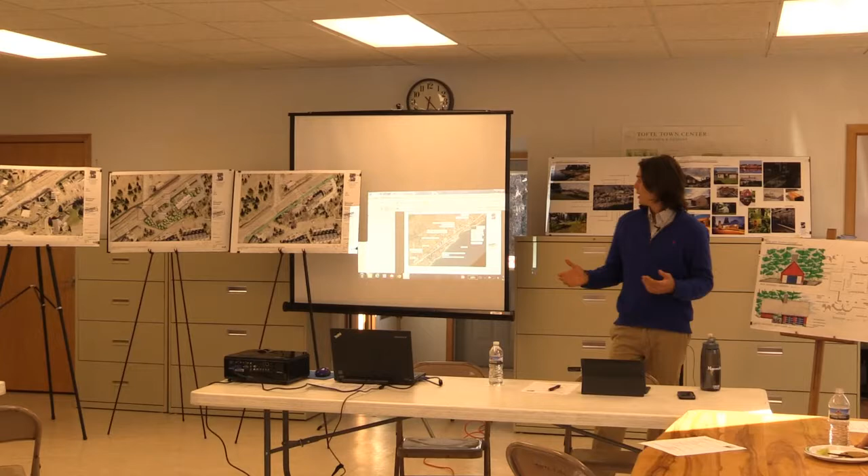Primarily, we got going on a design project to enhance the accessibility and safety of a wayside, our site, and also maybe bring in some interpretation. We had money to put together a wayside design project similar to this to improve the accessibility and safety, which was the main focus going into it.

As a Scenic Drive Council, it's a group of elected officials and volunteers from all three counties, all the way up in communities as well. We sat down with a list of 65 different waysides on that byway. We came down to a short list, had some conversation, got a shorter list, and I think it was down to about five. Late in 2014, we met with representatives from each one of those all along the shore.

Like we said, we had money to host one wayside design project. We wanted to get the most bang for our buck. We wanted to go in, talk to the locals, see what kind of capacity was there to implement, and not just have a wayside design that goes on the shelf. All of those meetings went extremely well. There was a lot of enthusiasm specifically here. A lot of people you see here today were there on that gorgeous fall afternoon, where we were able to come in and see the park and then move on.

So when I got back to Andy that evening or the next day, I said we were going to have a really tough time whittling this down because each one of those meetings went really well. The sites that we picked all had great quality, and a lot of enthusiasm turned out. So we got back and started patching together some way to make all of these happen and not have to make that hard decision.

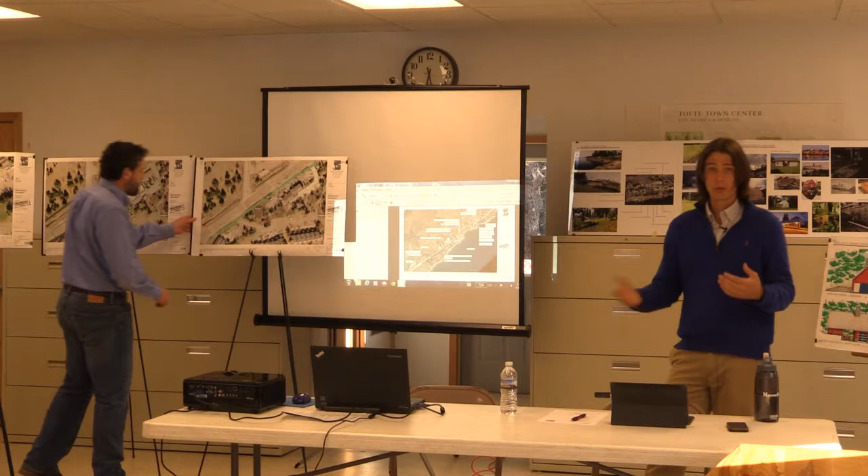So that's why we're here tonight, to present these for the first time, get the big ideas out there, see what sticks, looking for a lot of feedback and dialogue. Maybe there's an area that went a little too far, or just try to get some feedback on where we're at. This is meeting number 2 of this 3-meeting series. The third and final one will take the information that we get tonight and, specifically for the park, bring things down into a final design. Maybe with the trail, it ends up being down to 1 or 2 options. Ideally, just one after tonight.

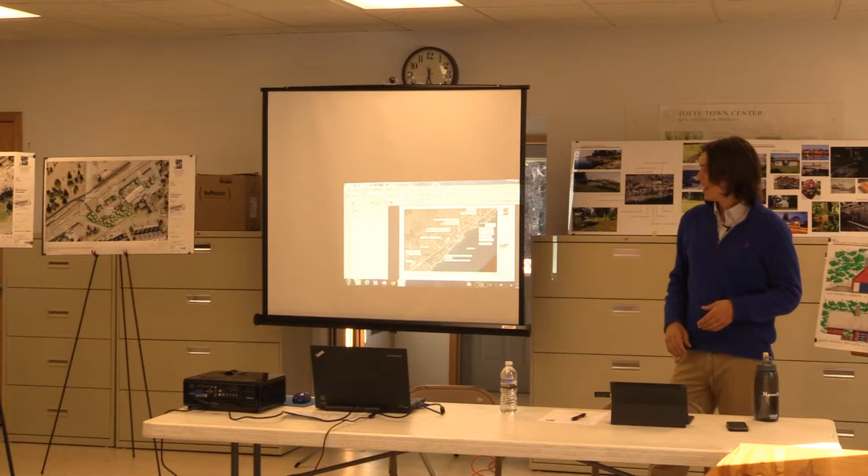That third meeting will be another public presentation similar to this evening, looking to finalize that document, and then any little revisions or changes that come from that, we can certainly make, and then look to put things into a report. In the past, we've done this for a while, where we know what that document needs to have in it when it comes to looking for extra funding, specifically with the park side of things, looking to get grant funding, some cost estimates, explaining the process so far.

Speaking of which, I want to thank Victoria from Moving Matters for being able to bring in the food. As you can see, with the little snafu with my microphone earlier and the camera in the back, we're trying to enhance our public participation for those people who weren't able to be at the meeting, to record some of these presentations and get that onto a website that they'll be operating for us as well. That's where you can give some more public comment. Some of these designs will be put up on there as well.

Yeah, I think that's about it. This is the first time for me seeing all of this stuff too, so I'm pretty excited to hear CJ explain it to everybody. So CJ, if you want to take it away.

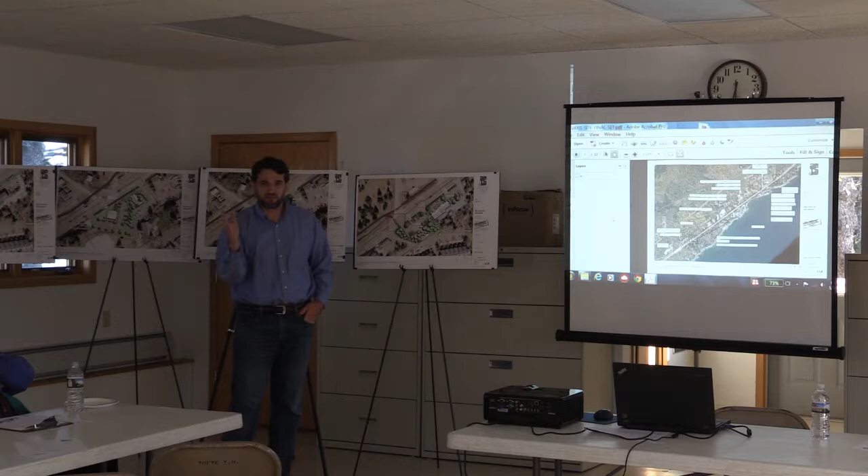Thanks. So we're going through 2 things tonight. The trail, we'll do that first, and then there's the Tofte Park piece, which is the shelter and looking at some improvements to the park. Hopefully you got a chance to get a little familiar with the boards on the wall. What I'm going to do is just go through these exact same boards. I'll blow them up on the screen, and we can look closer at both stretches. I'm going to blow this up so we can see it better.

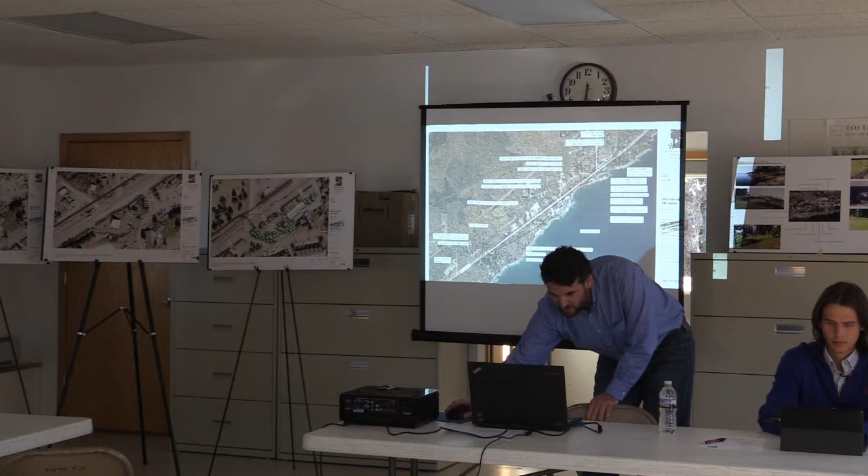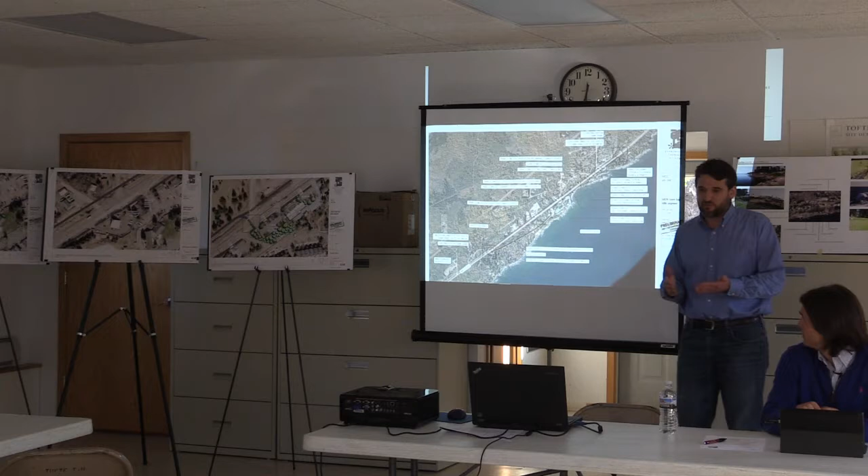So what we've done so far is we've looked at, based on information we got last time and in the beginning of the conversation, where the trail could go. There did seem to be a sense and a desire to have the trail along Tofte Park Road. It gets a lot of use. It connects to the park. We also talked about the north side of the road, which has a different trail experience, but maybe a viable option as well. We talked about the Bay Area, so a number of different options. We went back to the design table, and we came up with 2 main alignments, but there's a lot of different permutations with it, and it has to do with the need to cross the highway.

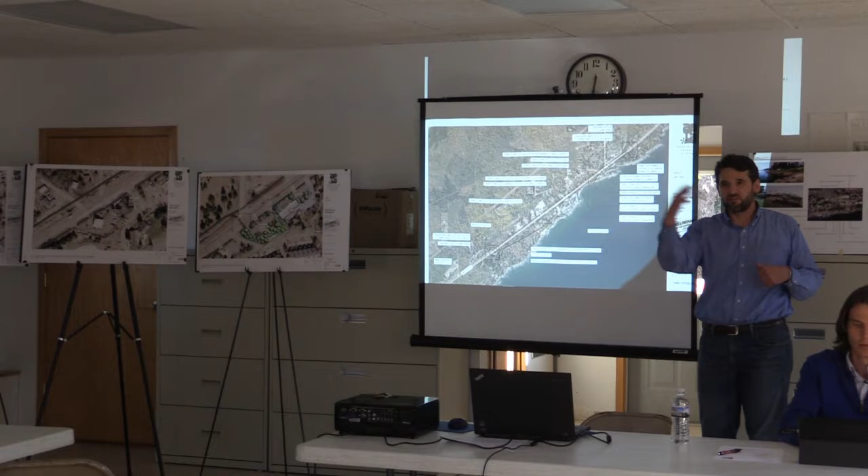Downstream, we're on the north side or the hillside of the highway, and upstream, we're on the lake side of the highway. So somewhere we have to cross, and there's really just that one crossing that can reasonably happen. We identified 4 crossing points.

The first is here, where it basically ends today. The second is in the bay, and we'll get back to more of that later. The third is at Sawbill, and then the fourth is where the trail picks up again, right at the other end. So it's taking it all the way on the north side. And there's 2 main options, and then obviously a lot of permutations when you start looking at where you cross. And obviously if we're crossing here, there is no more north route.

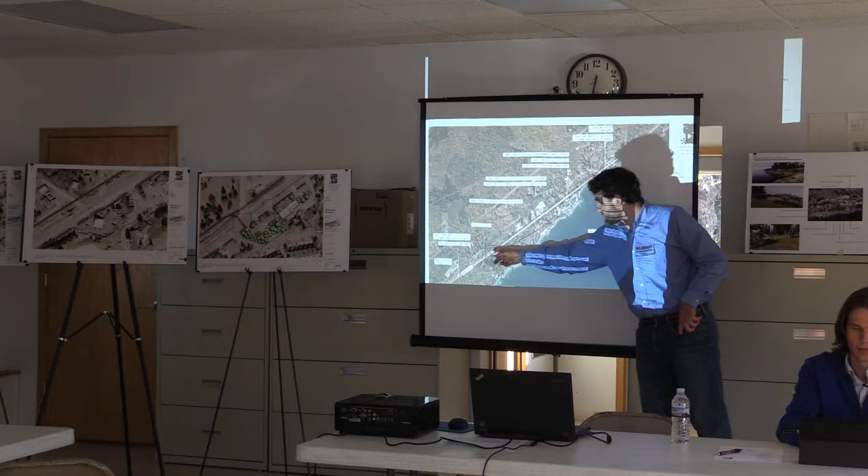So what I'm going to do is we'll go through this stretch first, and then we'll start over again. We'll come back down and we'll do the south stretch, and we'll look in more detail. There's a couple blow-up areas, if you notice those, right over here. The blow-up areas are at the check-in area at Bluefin, and then at the Coho Cafe, which were pretty tough areas to get the trail through.

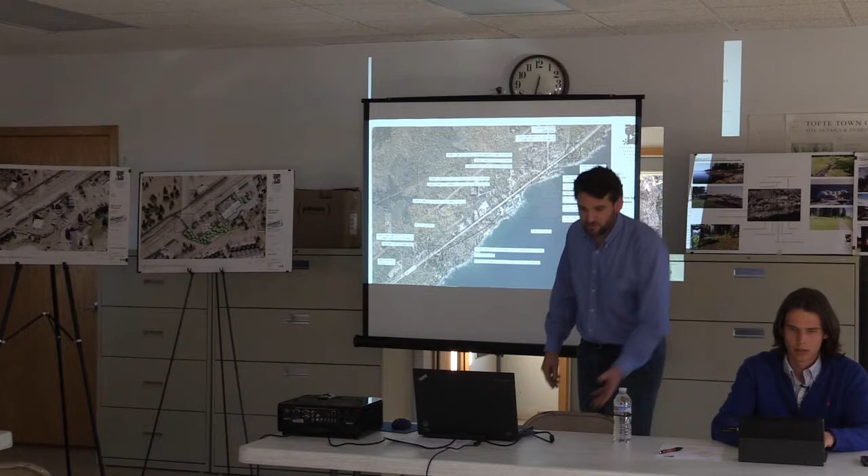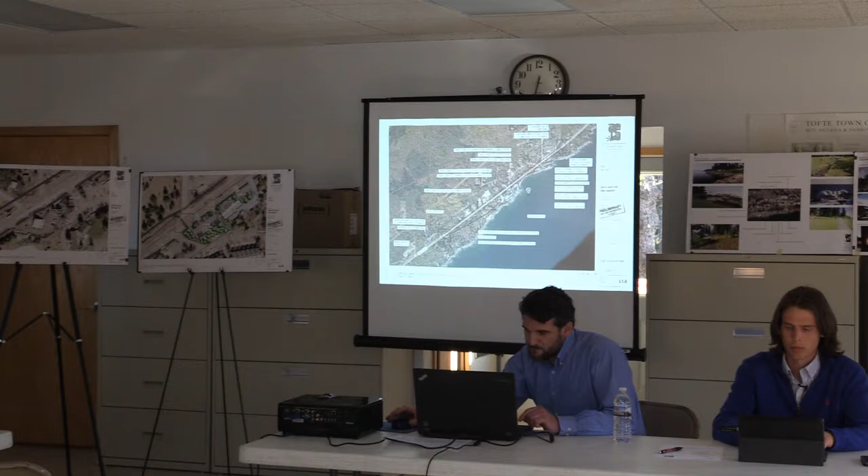Can everyone see the hand? Does that work? If that's okay. So what I'll do is I'll go through the north side of the trail. Sorry, I gotta get the microphone. Sorry about that.

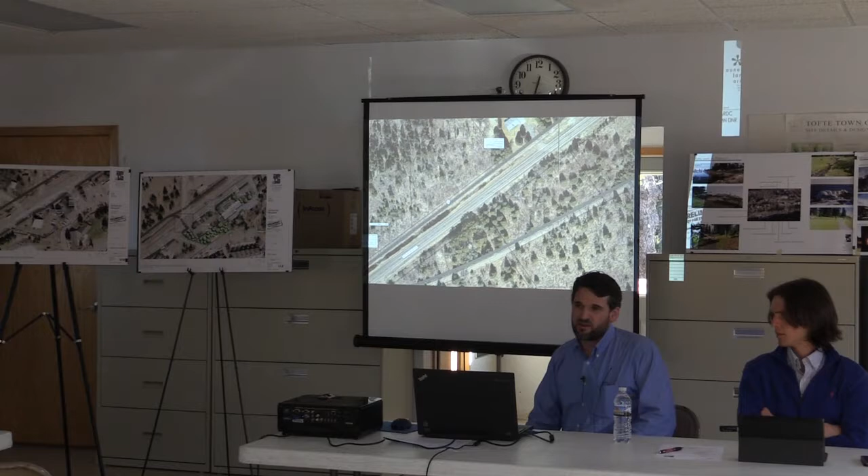So as we start on the north side of the trail, it's really the continuation of what you see out there today. We're basically just north of the ditch. We're following basically sort of close to the edge of right-of-way. The right-of-way data comes from the county. It's their database. I put approximate right-of-way on this because

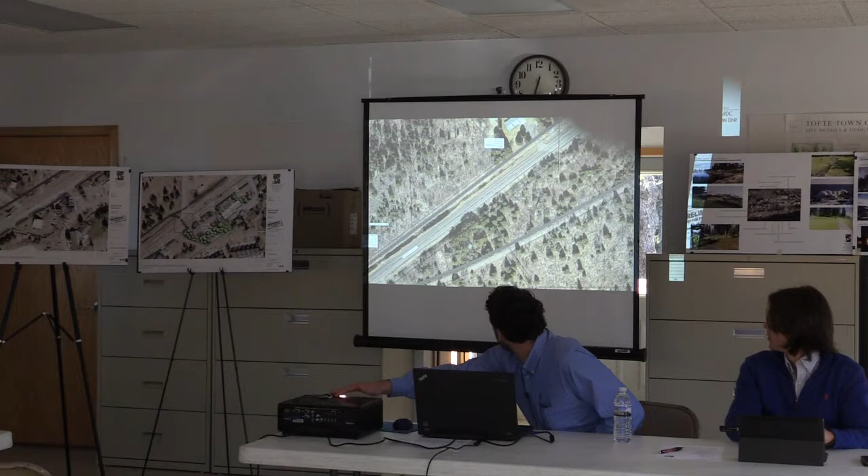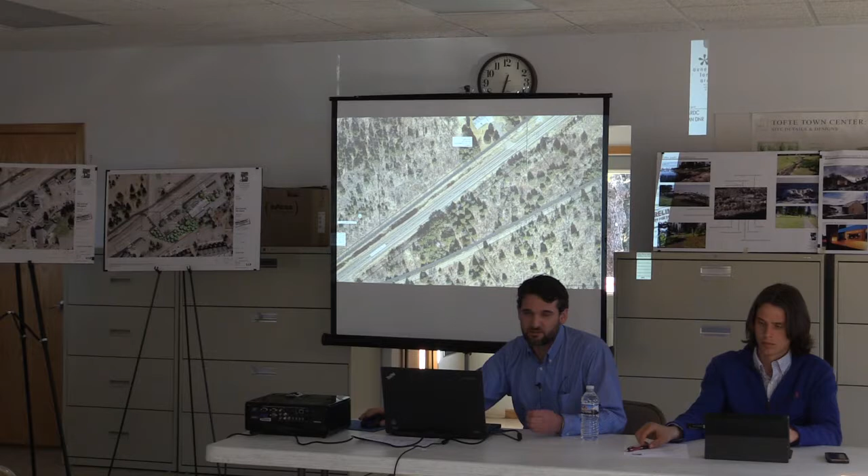Is this in focus for everybody? Can you see enough? Because it has a margin of error. It's not locationally specific. It's probably pretty close, but I don't have a survey, and so there's not enough information that's been ground verified to know exactly where it is. That said, the aerial photos and the LiDAR data give us a pretty good idea of what's going on with grades. So we're able to take a pretty hard look and investigate the physical constraints out in the corridor.

As you move along, there's a couple areas where we get into limited space. The right-of-way does jog with different properties, and so it moves closer to the road in some areas and further away in others. One of the other issues to deal with on the north side of the road is the number of driveway crossings. On the south route, there are not nearly as many. There's also an electric meter in this area, but this is where we get one of the jogs in right-of-way that becomes problematic. There's a solution to dealing with the jogs in right-of-way in limited space.

The Holiday gas station is another area. In this area, having seen it today, what I would propose is that the trail actually moves down and that we fill the ditch in those areas, and you'd essentially pick up water movement in this area and install a culvert, and it could daylight back again when you have the space to actually bring the trail through.

So part of this process, and what I want to make sure everybody knows, is it is a learning process. And it is concept design. We're not paid to engineer it. And so every time I come back, I learn something, and I also rely on you all to tell me what you know about the area. If things are looking way off, or there's a problem somewhere, let me know, and we'll go back and make the changes. We're not saying that these are the solutions by any means. So it's just one step in that process.

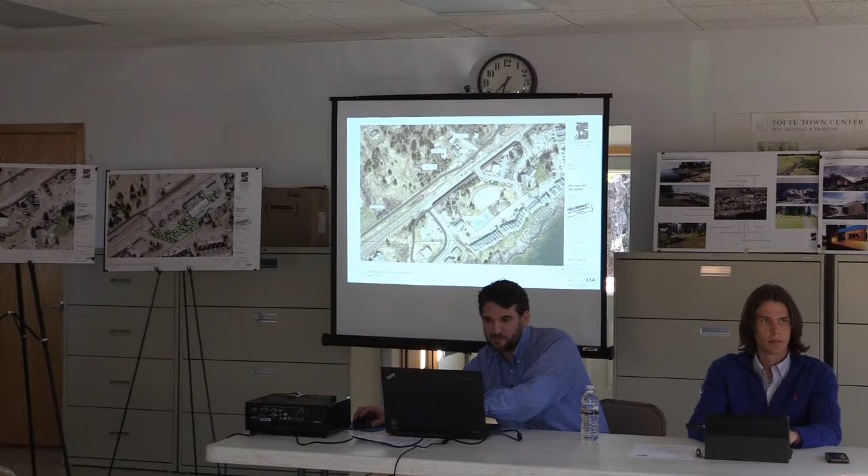We would have to fill this and put the creek in a culvert, and we could daylight it here again, not wanting to bury or put the creek in a pipe the whole way. The trail takes a jog in this area where the right of way becomes larger. I'll get to the next sheet. And I think that creek goes under the highway. Right up here it does. Yeah. It keeps going.

So, let me keep going here. So at this point, this is where we were at the creek, flowing into a culvert. It could daylight again here, and then it crosses the road right here. That's where it comes down and out. So we can move uphill. It's problematic because of the slope here, and so you're looking at a pretty steep slope to cut into, and so you're going to need some rock at least for stabilization.

There might be areas where there's some wall required, and then it's a likely candidate for guardrail as well because of the steep slopes that you're going to be running off it. Whether it's a wall condition or a rock-supported slope, the grades are significant enough where the recovery zone for a trail isn't significant enough, and you're going to have to guardrail it. So that becomes a cost issue.

The trail begins to move back just because this condition here is so tight for this crossing, and then moves through the back edge of this wetland area. And this is the second crossing point, and I'll get back to it in a little bit, but here I've graded in an underpass for the highway. And this would be a 10-foot box culvert. I'll come back to it when we jump on the other side, but there's potential to do that.

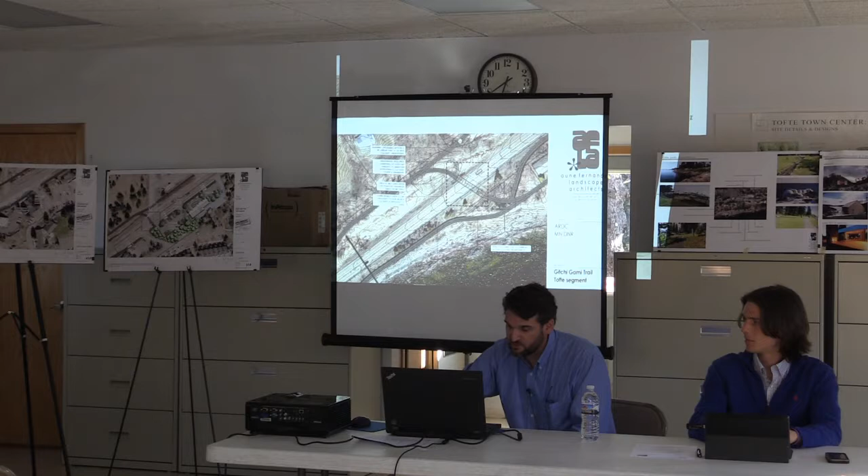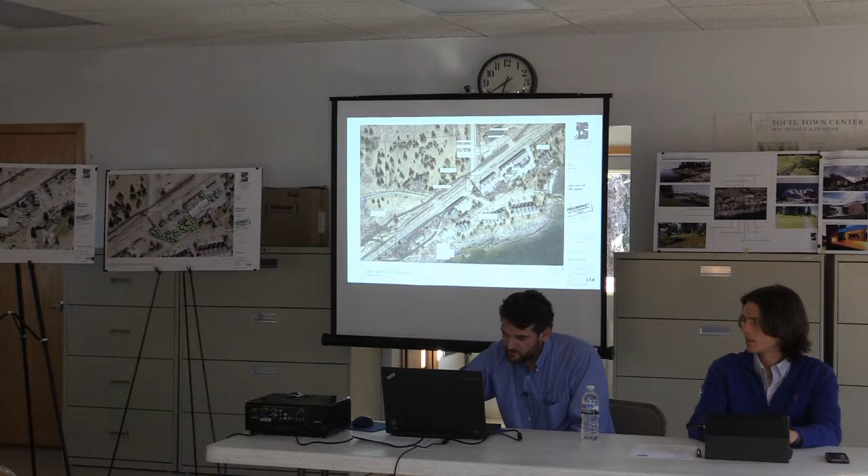As you move and continue on the north side, this again is another slope that's going to take a lot of grading. Ideally, the trail wants to be at 5% maximum, and this is graded to 8%. It's another situation where you'll have some rock reinforcement of the slope. These are basically 5-foot contours from the grading that I had done.

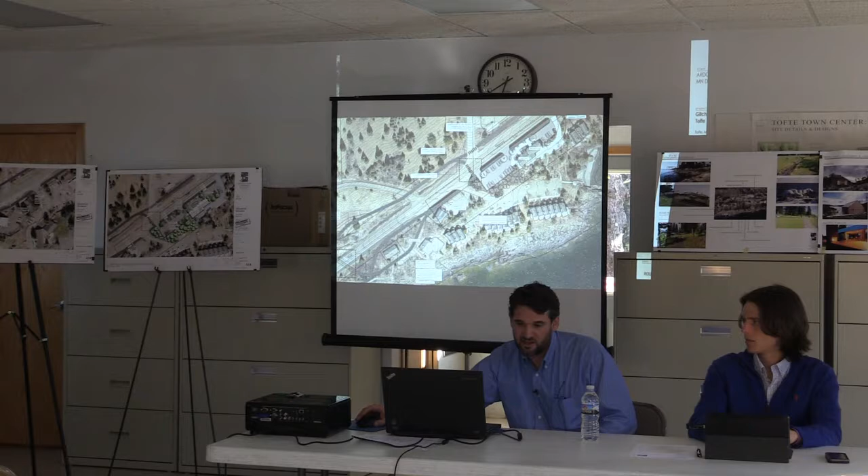So you're having to cut a significant channel. You're filling, kind of coming into the slope, and then as you proceed through it, you're cutting down. So this is basically in a trough for a ways down into that depression. There's a driveway crossing here, and then the road continues up to the Sawbill, which is the third. Yep.

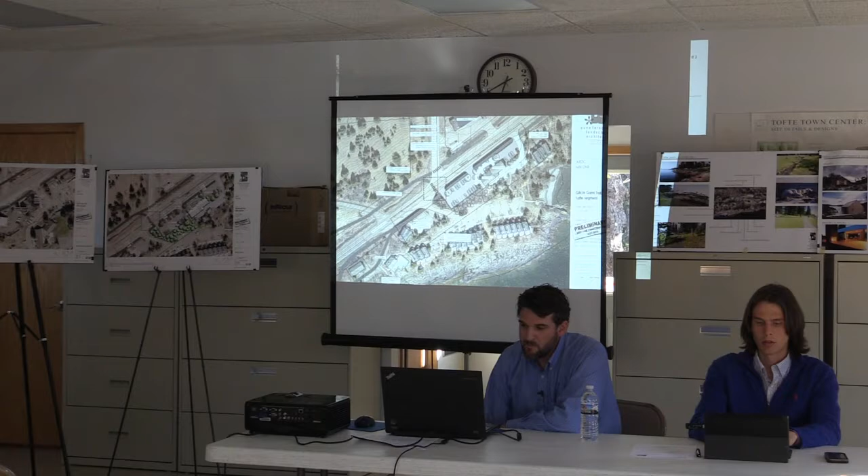Does the relocation of the Sawbill Trail to the highway affect this at all? Or isn't that in the cards anymore? I'm not aware. Didn't they have a relocation? Yes, if they redo the highway, the Sawbill gets moved to the west, so that it comes in at a 90-degree angle from where it sits now. Does it go like this? Yeah. I don't think it would impact the trail. In some ways, it might make it a little easier, even, because it's so problematic on this side.

Essentially, we can move along the road at this point and allow the drainage to work freely. This is that third crossing point, which is at the Sawbill. The efficiency here is that it's just a high-use area, and teaming up a crossing with an intersection is typically a good thing to do because drivers are more aware of crossings.

As you cross the Sawbill, then it's a real difficult situation again. There's buried infrastructure in here, there's a little bit of a wall, and then there's a ditch that moves water. So this is another condition where you'd have to fill all of this ditch and then have a pipe inlet at this point, taking your water in underneath all the way to this point, and then you could daylight the drainage again.

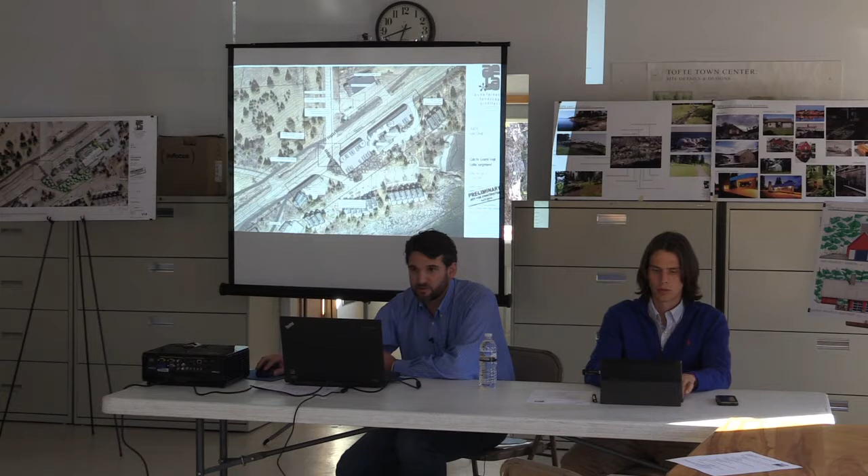Also, when they relined it, I thought they were gonna have a turn lane coming from the north, taking a right onto the Sawbill. Yeah, there kind of is one right here right now. It's not striped as a turn lane, but it's basically a shoulder. So they're not gonna widen the road to the point where the turn lane actually goes where the bike path is, huh? You know, part of the follow-up that we'll be doing is talking to MnDOT, so I think it's something that will get addressed. But I'll certainly ask the question, because it is tight.

With filling of that ditch, you can maintain your grade separation and pavement separation from the road, and then continue on the north side. Essentially what's happening here would be moving up the upper edge of the ditch. And then this takes us to the end of the north route.

So we basically moved up adjacent to some of the gravel area, and then we're on a little bit of that higher terrace, if that makes sense, once you get over the top of the ditch. So it's a flatter area, and essentially we move all the way out just past the billboard, and then the crossing happens here, much like it does on this end already. So you have an at-grade crossing with the road, and then this is the trail where it picks up right now. So that's the existing portion of the trail. Any other questions on the north route right now?

I just had a question on a couple of those property owners in the beginning. Yep. You said the right-of-way kind of fluctuated a little bit. Yep. Would there be easement purchasing requirements in there, I would imagine? It would either be easement purchasing, or else you'd be in a condition where you're filling the ditch and then having to put storm sewer infrastructure in with it. And so the feasibility of doing that is also another question.

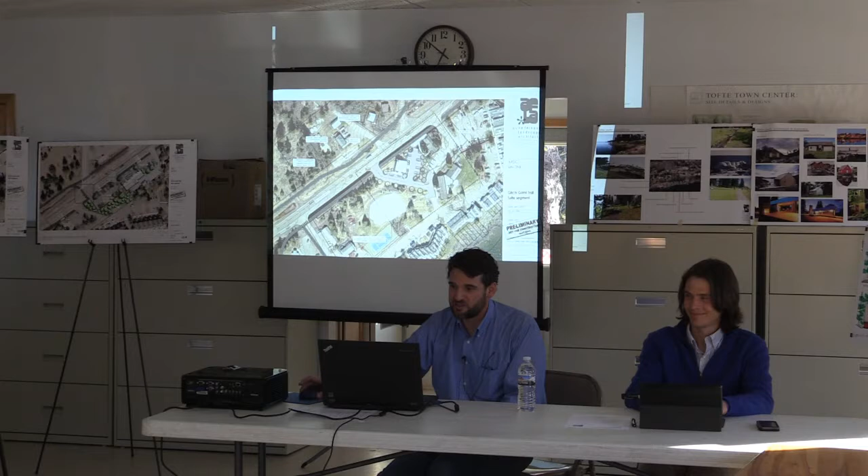We'll get back to this site with the blow-up, but this is the Bluefin check-in and the area next to it and how it could potentially be configured. The trail moves through here, and there's two options for this area, and I'll get into both of those. On the other side of the main entrance to Bluefin, that trail continues in that direction. And then I've got the blow-ups of the Bluefin check-in here.

So this is an existing check-in. I was encouraged to look at a scenario where the parking in front of the check-in is removed and is actually relocated into this facility. And it's understood that it's essentially an accepted non-complying use to have parking here, moving into right-of-way.

This could be a potential solution that allows the trail to come through, and really an ideal situation. This would be the new check-in at Bluefin, and their operation could function well with parking space behind as well as drive-up space, whether you're coming from either direction, to stop and get into the new check-in facility.

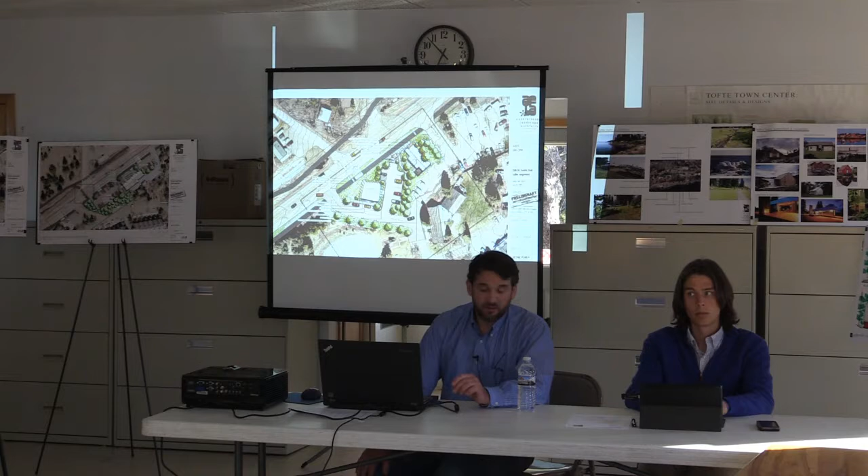Question. Is that in Bluefin's plans right now to take the old bank building and use that as a check-in center? I'm not exactly sure what their plans are, but Dennis asked me to look at this, so I just figured it was. But we didn't get into any specifics about what they're doing. Anyhow, he encouraged me. Well, we know that Bluefin will be using that building. It's just a matter of would it be for check-in or administration. He said it's possible the check-in would move there and to look at it.

This is the change that you would need to make it work. If the check-in is here, to not have the traffic doing things like this. And so you have actually a real easy connection here to punch through, and then you can get into the network of Bluefin drives and parking areas.

As you move along the trail, this would be kind of a trail rest area. What I've shown here is a kiosk, a bench, a couple bike racks, and a fix-it station. A fix-it station is essentially a stand that's got cabled tools, all the bike tools you need. There's a pump in with it. It's kind of an industrial strength set of bike tools, and it's actually got a rack that you can lift up and put your bike on it.

So it's a real nice resource for a state trail. We've worked on some other projects where we've installed these. Bikes do break down quite a bit, so they do get used. And this becomes a little wayside for bikers. The kiosk could have information about the Gitchi-Gami Trail, about wayfinding around town, local businesses, the park. It can really go on from there, but it could be an opportunity to do interpretation as well.

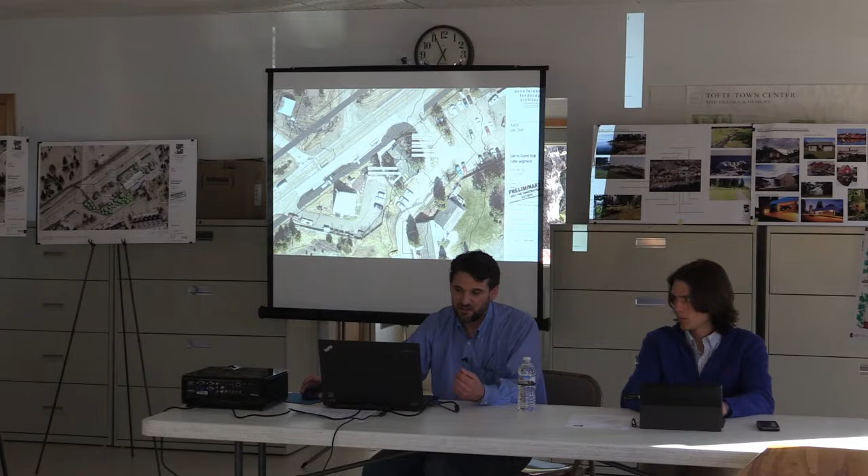What this does is it formalizes a turning lane into Bluefin, and it also provides a parallel parking spot for 3 cars. And then the bike trail has enough space to move through with a 3-foot offset, the concrete behind where you park, and a concrete pad also in front of the Bluefin check-in. So you have a little bit of a conflict point with bikers and people getting out of cars, but there is some space here for door swing and some of those issues. So it actually works out okay.

This solution from a MnDOT standpoint might be marginal at best. So I don't get my hopes up with that one, but it's a solution nonetheless. I don't know if in general no parking along the road at all would be the response that we would get.

So moving past the main entrance to Bluefin, I was also encouraged to look at this passage down. The trail can move behind this facility and then move downhill at 5% grade and essentially meet up with the bituminous trail that's here right now before you get to the boardwalk.

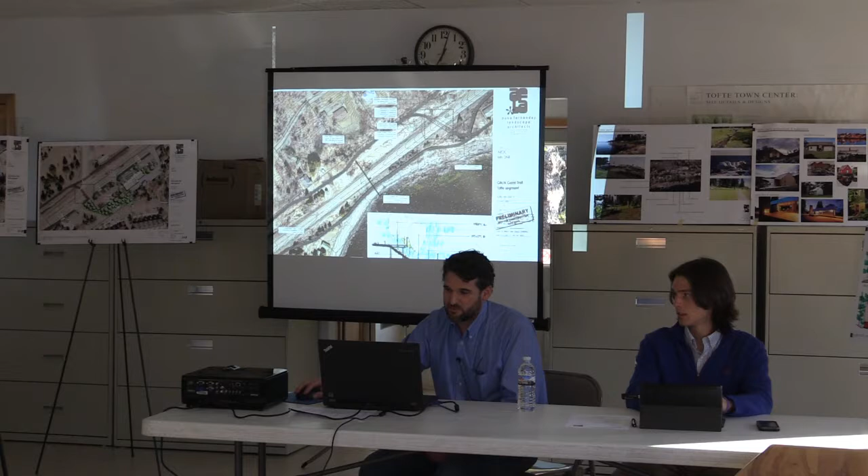So getting across the bay, leaving the boardwalk in place as it is, is a real viable option. Back to the box culvert: what happens to make this work is it's not deep enough to make it work. With some grading, you could get it to work. I would not say that this is an absolute solution. I don't have a survey, and the depths that I got the trail to are not that bad compared to what's there now. It's lowering it a couple feet, and it looks like we're right at that 3-foot threshold of fill over the top of the box culvert.

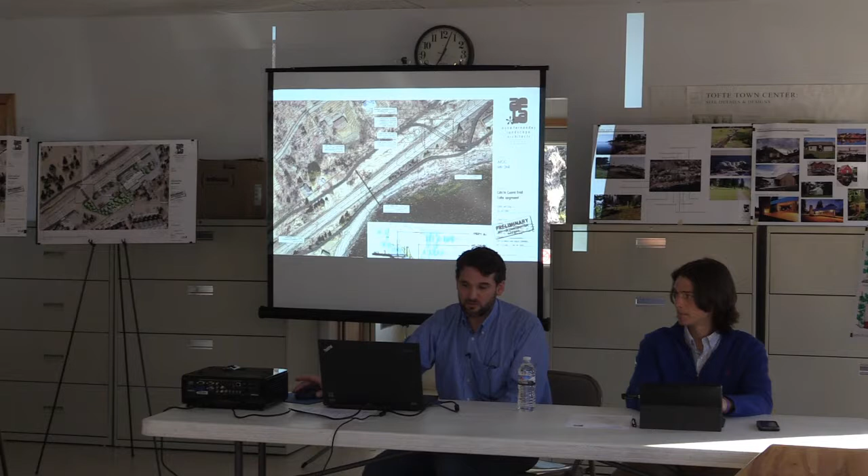What it does require is digging out and lowering a portion of the wetland so you can have a point to bring water to, because as you lower here, you'll be in the lowest spot of the wetland, so it requires some extra excavation. You'd also need a standpipe to take water, and this is the opportunity then to move that water out, that standpipe, and a drainage could be brought underneath the trail and then daylighted out at this point. So in an overflow situation, there is capacity to do that.

So a couple of things. One is this can't be vetted truly until it gets engineered and a survey is done so you know the exact conditions. And then two, a stormwater study would have to be conducted to make sure that that works and to see what size storm pipe you need to take the water out. But the grades work out.

It slopes through the culvert all the way out to the other side, and so everything is kind of connecting in at that point. So there is potential there to do that, but it would have to get vetted at another point in time. It's a compelling thing to look into just because of the safety factor, to get people across the highway in that manner. So if the trail is on the north side of the road, I think it's worth the time once additional information is put together to take a pass at it and see if it really works.

So moving forward from there, these are a series of options. If the trail were to continue through, we have a trouble point here. This is a 16% grade, so it's really steep. We would essentially be utilizing the Bluefin parking lot and their driveway for the trail. I did take a look at, and Dennis asked me to take a look at this as well, could you bring the trail this way?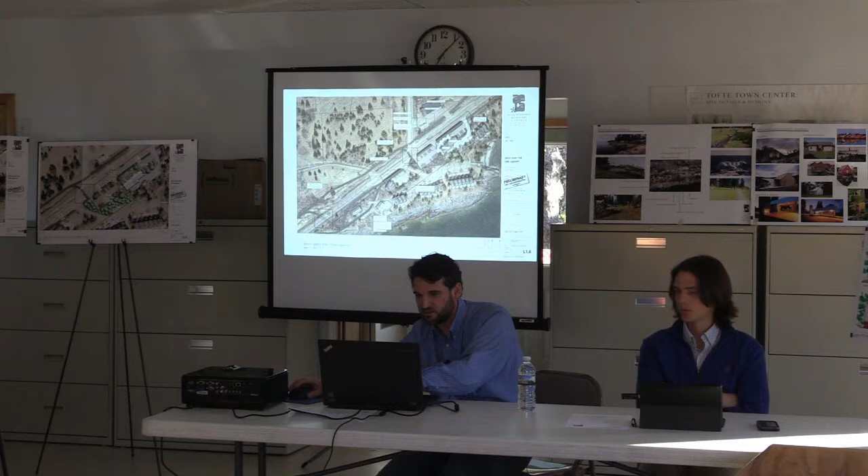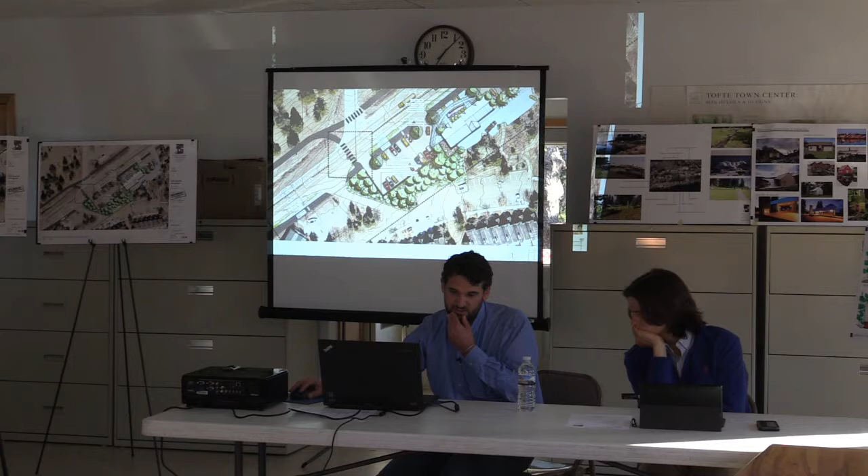So this was the other area that I was encouraged to look at. Here's that trail coming in with the pavement separation. We've got their through lanes, our turn lane, and a shoulder, median at 8 feet, Gitchi-Gami trail at 10 feet. At this point, as we get up to the road again, it could become state trail.

So the first thing we looked at, it wasn't the first thing we looked at, but after our discussion, I was asked to look at removing the parking from in front of the Coho and expanding the parking, which is right here right now in this direction. By building a retaining wall up to this point and all the way over, it ties in to grade about right here. You can replace all of the parking that exists in front of the Coho Cafe right now, including the number of parking stalls here.

It's a little bit hard to count because it's tough to know how people actually park, but I actually think we might have one or two more stalls in this configuration than actually happens out here right now. This parking becomes a little more contained and formalized on this side as well. So what that does is it opens up the opportunity to have over an 8-foot separation. There's a paved shoulder that's 8 foot as well off of the 12-foot drive lane. So we have good separation from the road.

And then we have a nice community space essentially in front of the businesses. I looked at this similar to the area over at Bluefin where we have a number of bike racks and then a fix-it station over on this side. There's a paved area, then sort of an arcing path that makes a solid connection from the parking lots all the way over to both businesses and sort of vice versa. This is a small seat wall that's in front of the businesses as well.

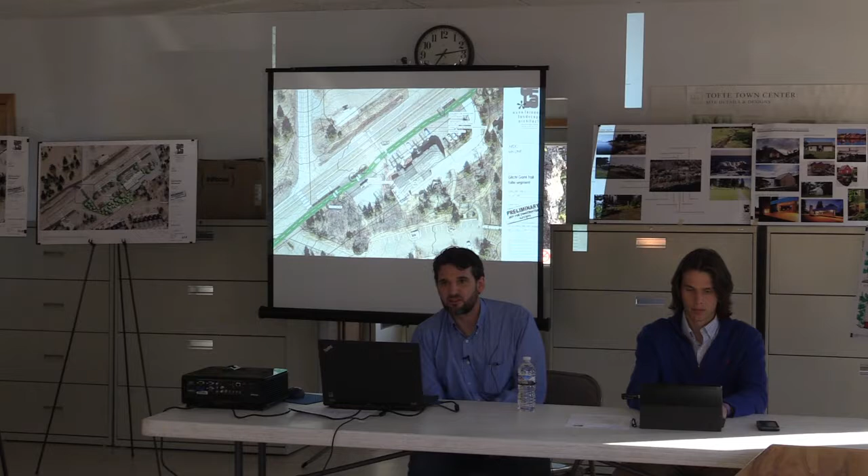This technique of the trail, and this literally is a proposed painted green trail, so the whole pavement gets painted, is a technique that's being used all over the country and has been implemented successfully in a number of different places. I don't know of any case where it's been done on a trunk highway. So that would be definitely pushing the envelope and does not fit into any book of standards from a MnDOT perspective. So it would be a long discussion to figure out how you would deal with something like this.

I think MnDOT certainly recognizes the importance of the trail, but this would be a problematic area to do it. It gets us back to, again, how we would pay for it with state money or federal money, and otherwise looking at it from using different funding sources and trying to get at least permission from the state or the district office to do that in MnDOT right-of-way. There might be some ways to actually build something like that. But we don't have many other good solutions other than something like this.

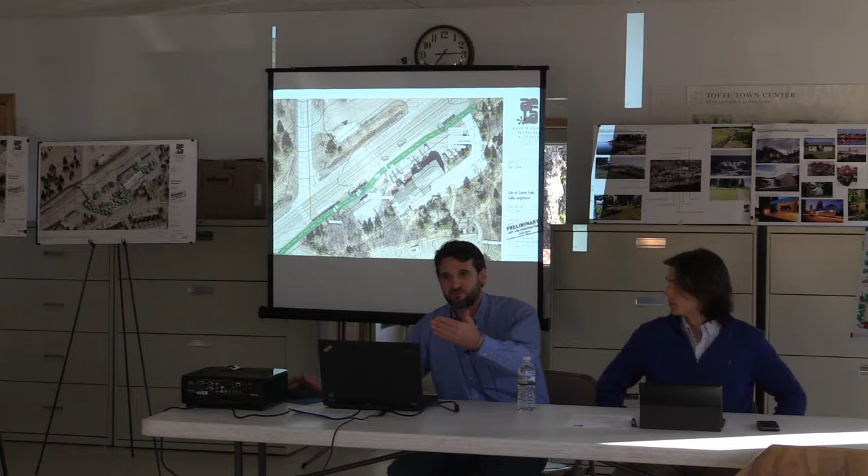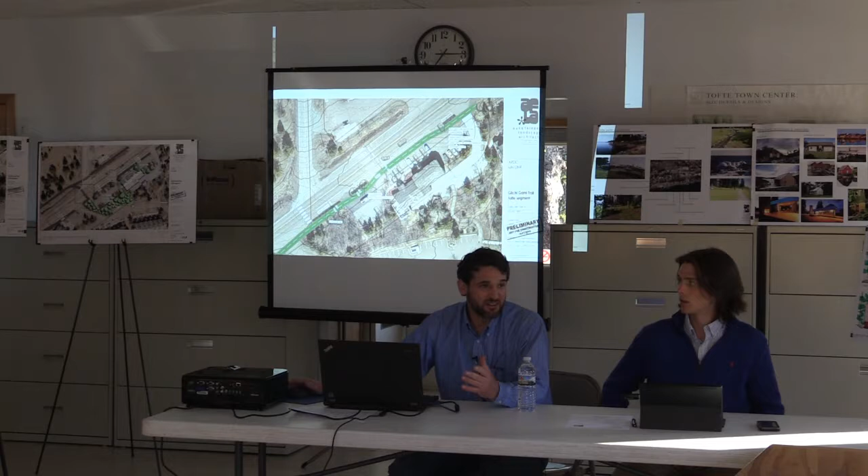Any other permutations in here just move the cars further away from the building and cause the back out movements further into traffic. So it's a tough one to get through without the capacity to do what was shown in that last option. And you had talked to Dennis, and he's willing to do that. I was shocked. I didn't come up with the ideas. He said, see how much parking you can get in and look at taking out all the parking in front of the building. Well, the parking in front of that building is problematic. I drop my kid off the bus there every day, and yeah. That's not a good spot.

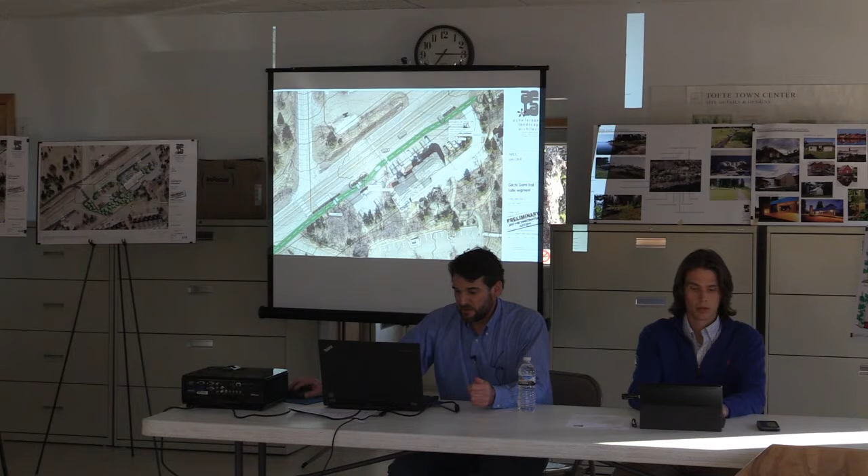And the other solution, from a business standpoint, you can replace and potentially even get another stall in there too. It's safer. It's a defined parking area, both of them. The hinge point there is it requires a significant retaining wall. The retaining wall at this end is going to be roughly about 7 feet tall, so it's not a minor retaining wall.

But looking at the cost of doing some of those things and keeping what is probably a much more aesthetically pleasing trail to the south side of the highway, there's some significant cost to filling those ditches on the north side of the highway as well. No doubt about it. That's a tremendous amount of fill to fill those ditches. I'll get to my summary in a little bit, but you're on my line of thinking.

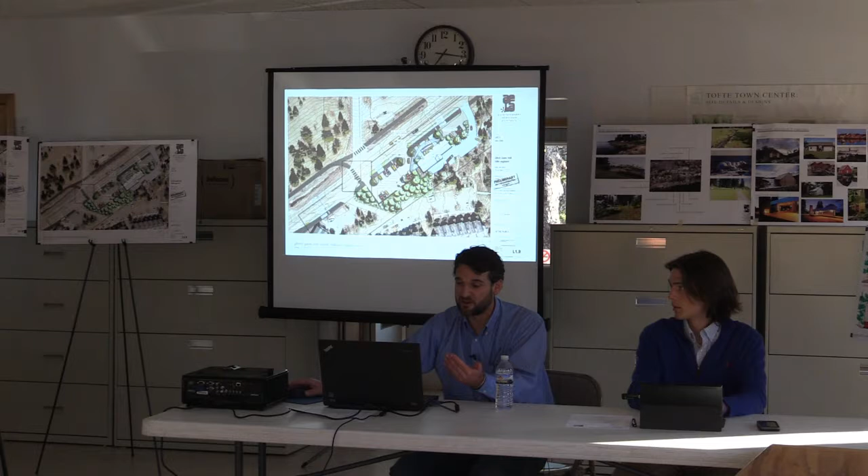The other thing, I called it a community space, but even from a business owner standpoint, there might be some compelling thinking there. Drive-up parking is always the number one thing. You want people to park at your front door. For a place like this where you have a lot of local traffic, from local residents as well as tourists, this might look more interesting from that standpoint.

So yes. But you said it was out of the question to go below the Coho, which is Highway 1, the old highway, run right straight behind the Coho, all the way to Jerry Lowe's. It comes back out on Highway 61. Yeah. That was the original highway. The original highway was below the Coho. And it goes all the way through to Jerry Lowe's and comes back out on Highway 61 at Jerry Lowe's. It came right through here, no, a little above that, up here, right there. All the way through there, that was the old highway.

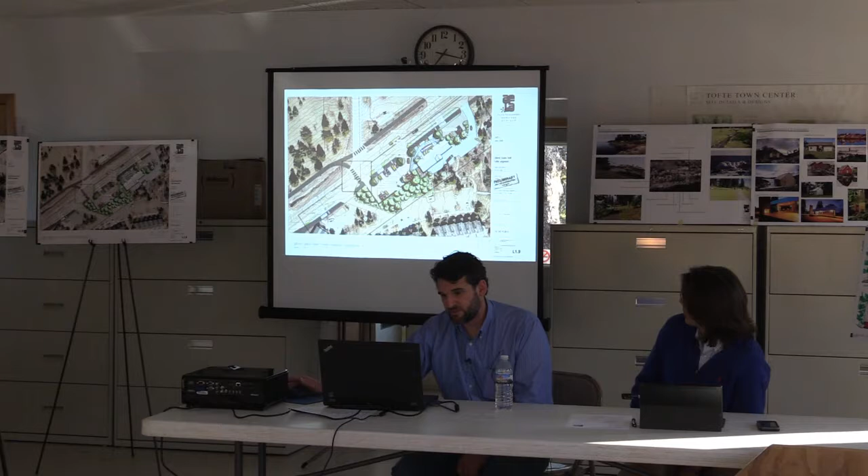And so there's a couple, I don't understand, you said that the terrain was perfectly flat all the way through this spot right here. Yeah. But I don't think we can get down to that point within grades. The other issue is, I guess the question I have is, is this property in public ownership? Is it publicly owned, the old highway right-of-way? No. Okay. That back part is behind private.

Coho and Water's Edge is used for deliveries. Right. But it could be even a little bit below that. Could be a shared road. That would be dicey. You got some other congestion down there because you got parking for several of the businesses behind the town. And that option that showed up more there, I think, if that were to be brought to fulfillment, that would make a very nice addition to our town. It'd be a very unique area for people who are biking on the trail to stop.

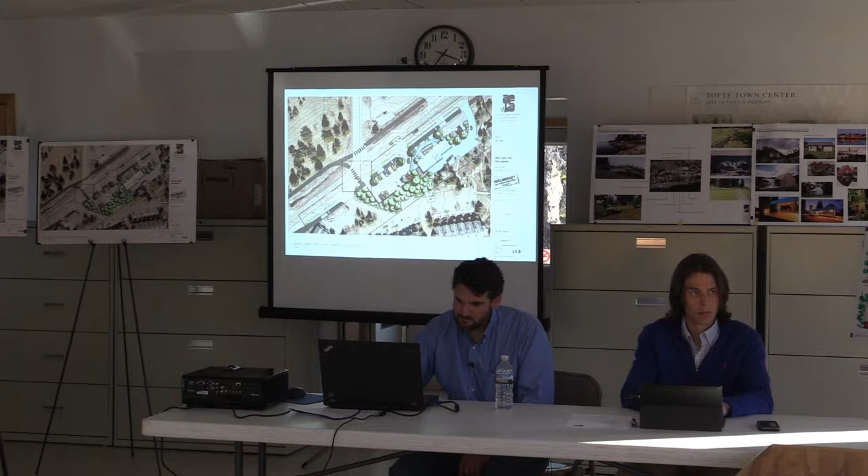I was fortunate to do a lot of biking in Iowa earlier this spring, and they have a lot of those little kiosk areas along their trail systems, and they're used a lot, and they're nice. So you bike from point A to point B, and they have these little kiosk areas next to restaurants or something, and you can stop, get off your bike, check your tires, and go in and get something. And it seems to get a tremendous amount of parking use for all the businesses down there. That would eliminate all that.

I can keep looking at it. The issue here is that this one is a little bit easier to see. These are 1 foot contours. We run into a couple problems. One is the 10% grades. I think it's 11% grade that runs down this driveway, and then this is all 1 foot contour on this back slope. This is existing condition, the contour lines. So it gets flat right here, but with the filling that's been done over time on this edge, you'd be cutting in through all of this.

And the other issue is if it isn't on public land, again, you're looking at finding a funding source to get all of this stretch built, or I don't know how you'd build it on an easement of someone else's. You'd have to purchase easements. Yeah. Well, Dennis owns all that. I'm just saying, it'd be an option for losing all that parking on that property. Well, the real issue, the biggest constraint is getting from here down because it's so steep. The other thought I just had is if there isn't a way to stay down, then coming up through this could be an option.

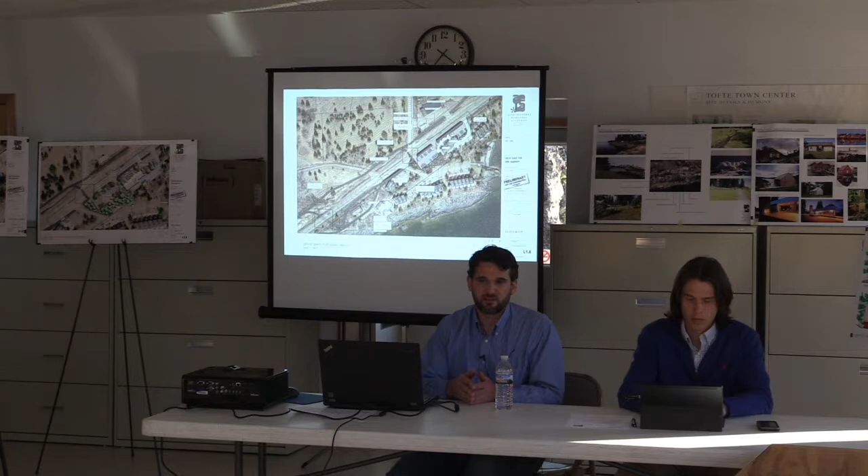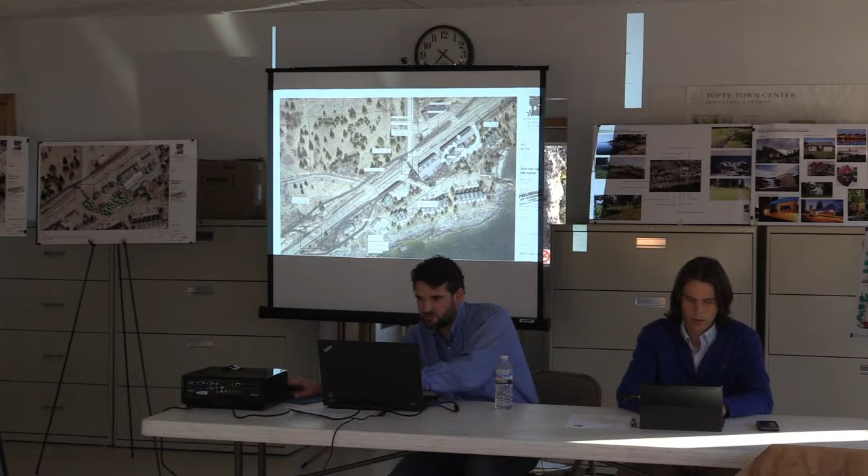The idea would be that it would be built on the public space portion of it as a trail amenity, in this kind of wayside trail. And that would open it up to different types of funding. So you can fund the interpretation, and the wayfinding also opens it up for funding from different sources. And then there's an overlap with that private property. But looking back at where that property line sits, which basically runs right here, a good portion of these facilities, the interpretive panel, the fix-it station, a portion of the concrete paving, and the bike racks could all be on public land, which would make them eligible, and technically the trail funding could pay for some amenity improvements as well, like bike racks and things.

If it became a multi-funded project, the lines are literally drawn in space on those property lines, and the bids reflect the amount of square footage of pavement from one to the other, and the different pots of money pay for it. So that was the thinking, at least. And then the other option is for the private property owner to contribute some money as well. So that landscaping, like in front of Water's Edge and Coho, would be up to those owners.

I'd say it would certainly be up to the owners for a couple of reasons. One, the stuff up on the building is theirs, and it could get reconfigured with a project like this. I think it would make sense. And then two, the plantings that are further up on these little bays here would become a maintenance issue as well. I believe I already maintain the island plantings that are up on the parking lot area, kind of right in here. So I think there's a precedent there for that type of use, but without the adjacent property owner agreeing to some kind of maintenance, it probably wouldn't be a good decision, and maybe better just all paved. So that's the way I would look at it.

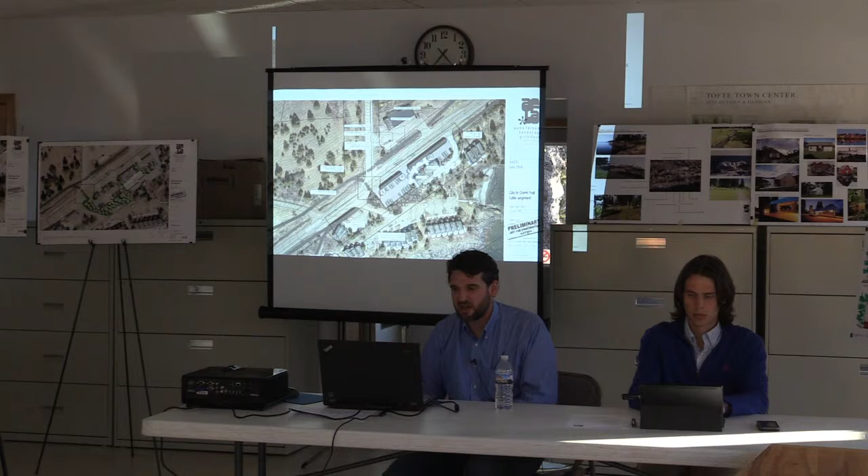I've worked on some other projects where the adjacent owners are actually required to sign an agreement for maintenance on amenity improvements and streetscape projects. It happens in municipalities quite a bit, so there's different mechanisms to get some guarantees, at least on paper, that people will continue with the maintenance of the improvements they want to see. So that was that option, and this one.

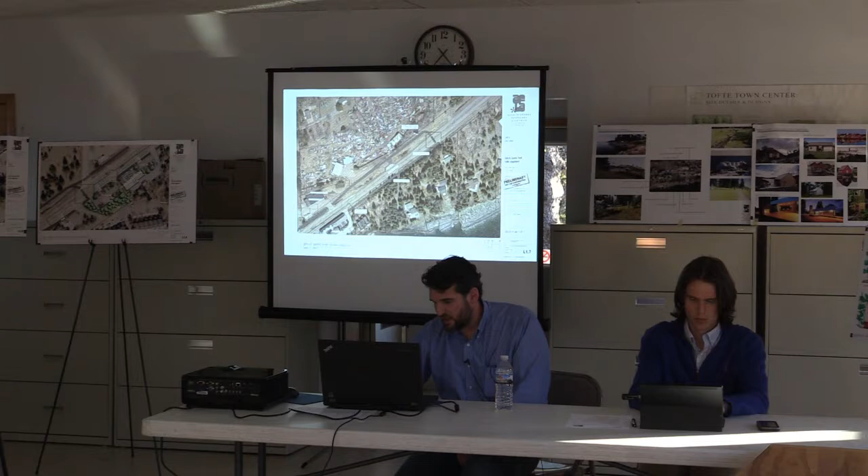The last stretch then, are there any other questions on the path from the business area here? I'll keep going with the rest of the trail.

Moving along then through the rest of the trail, it could continue on the lake side of the road, past the driveway, and it's okay for a little bit, and then the grading becomes a little bit difficult because of the slope off the road. I did some grading studies, and you do end up taking down some trees. That right-of-way edge is right here on the outside, but it's doable. There's a little bit more filling and cutting to do with the trail through that area, so it's a little more expensive portion with the grading constructability of it. But it's viable all the way down.

There's a couple areas where some of the grading that I was running was jumping over the right-of-way. Those are typically handled with grading easements for construction. You could look at other design solutions as well that might eliminate some of that grading if it's a small wall of some type, and looking at how far the trail really is from the roads. There might be some different ways to ensure that the grading doesn't pop over that right-of-way edge, but it would continue along. There's space for it, and it would make its way up and connect to the existing trail. So it's a lot to digest.

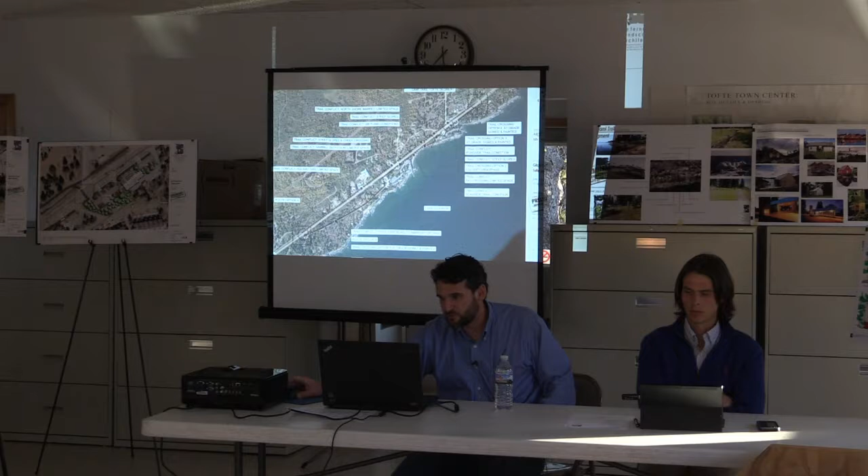And so I think awareness for drivers would be a good thing to do, along with painting the road pavement itself. So it doesn't fit into a state standard, but if it is paid for in different ways and is sort of maintained as a bikeable local road, it's a real feasible option. That would then allow still the state trail to be built through this portion, and potentially all the way back up to the connection point there.

So I think looking at this mix of connection points, there's some precedent for it, I believe, with the Gitchi-Gami Trail, if I understood some of our discussion earlier. And so that may be another viable way to do it. Yep.

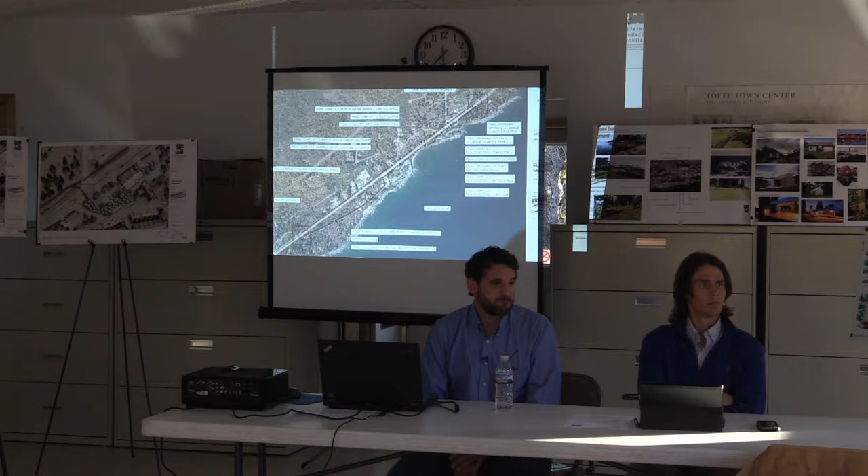You mentioned the striping on the Tofte Park Road. If you were to factor in the cost of construction on the north side of the road, from the junction down here up there, it's going to cost X amount of dollars. Striping the Tofte Park Road is going to cost X minus a heck of a lot. Yep. How about hitting it in the middle somewhere? What would the cost be to widen the Tofte Park Road, so you have a separate bike lane? Wouldn't that be a lot cheaper than building on the north side?

I don't believe so, but it could be. It gets to the complexity of the stormwater facilities that you'd have to put in place by routing that trail on the north side. Widening the road to some degree requires road reconstruction as well, so you'd have to look at how that really works. So that has been thought of. Yeah, and it's a constructability issue to some degree because you'll be rebuilding a portion of the road.

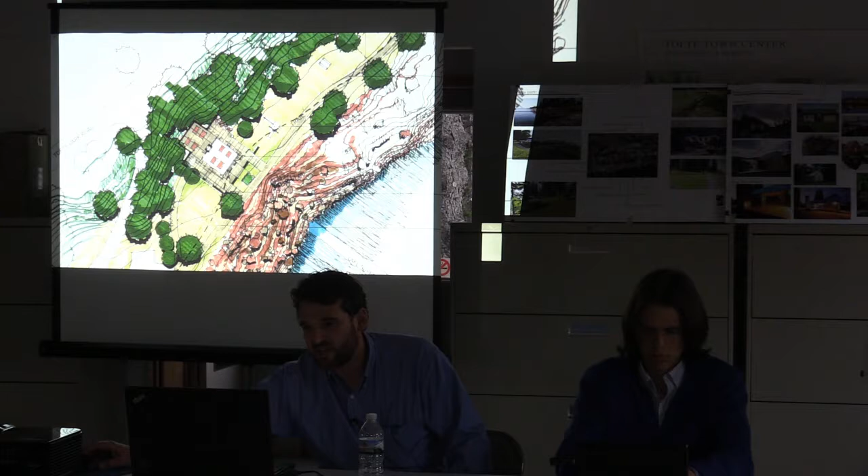The idea of a deck or some usable space around the shelter was brought up in the last meeting as well. This actually proposes concrete paving, and the idea would be that the concrete paving would be met and framed with some low 18-inch seat walls. And so you could articulate the bottom. The walls essentially run off into the green paved space.

Another thing that we identified was a 20 by 40 footprint. What types of uses happen here and what may be possible. We talked about a number of different things. And that's essentially the size of a rented tent. So you've got that block of space that's flat and usable here at the front. So what this does is it brings an ADA accessible facility closer to the parking, increases the parking,

and let me get back to the site plan here. Sorry about that. It gives you more usable space around the shelter, so it really becomes flexible for a variety of different uses. The one thing that we showed proposed moving was the playground, and so that shifted out of that space and was slid down. So I think the playground is in a relocated location.

This hatched area right here is the existing shelter, just for some perspective as to where we are. It's pretty easy to see where we're siting the shelter. If you come out here, there's kind of 2 little coves. The grading here, the slope comes out to a point, and it's deeper here, and then it's deeper into that second one. And there's also this large existing spruce.

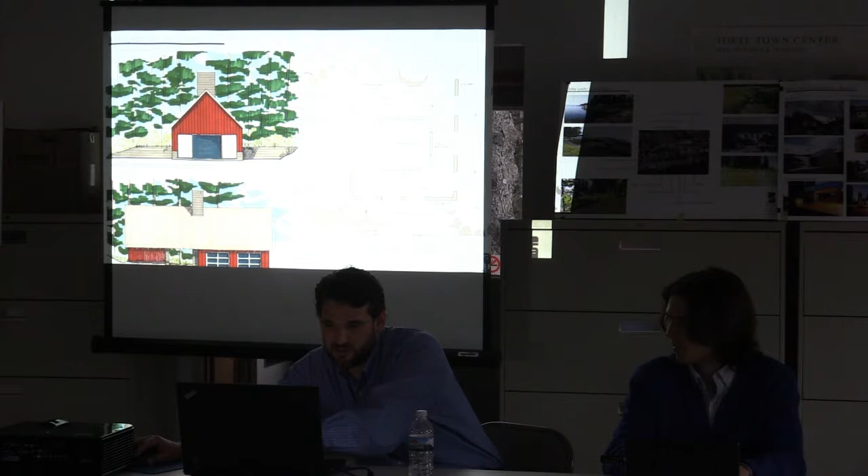The other thing to mention here was the connection back to the trail at this location. So you've got this kind of movement that could happen, which would be a nice way to get around it. I do think you need to make some connections back and forth. So that essentially describes how that whole piece would be set and nestled. And I'll bounce back and forth a little bit between the 2 schemes, but this is what we came up with, and I think this view here is the one to start with.

I showed you the idea of the pass-through. The concept for the shelter looks at establishing an outdoor open-air component to the shelter, as well as an enclosed component to the shelter. That trail walks up and approaches right on this axis, so that ADA accessibility comes through here, and so you're accessing over the pavement around the building and right through it.

This is a board and batten proposal, and essentially these are battens that basically just screen off the backside. What happens when you cut in the wall then is you end up with a flanking wall to either side, and that wall cuts back into the hillside for retainage. And so you've kind of nestled this little cove on the backside of the building.

The fireplace sits directly in the middle of the building and would function from both directions so that you could have a fire and a gathering outside, or you could do it from inside as well if both happen at the same time.

One of the things we've seen with some of the successful park shelters is that they're sort of breaking down the space of the shelter. Shelters that have capacity for people often get kind of taken by one smaller group. If there's 8 people in a shelter and it really could handle 30 or 40, it's weird to walk into someone else's party. So this idea of kind of splitting the space makes it a lot more flexible.

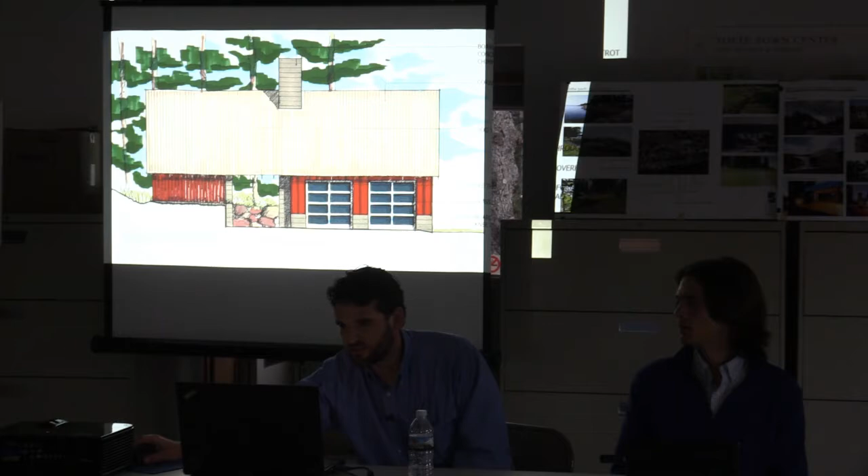The proposal for the base as well as the fireplace and these walls is a board form concrete. There's been kind of a resurgence of the use of board form. It's a traditional way of forming concrete when plywood wasn't available. So it has kind of a timed look to it. The texture creates some level of interest. I've got some more photos that I'll go back to and show you some examples of what that looks like. But it's a good aesthetic, and it looks good as straight gray concrete as well. So it's an interesting way to do the finish on the building.

The front of the building then essentially has a large glass front. Those doors being so close to that front wall, your procession from the sides and right around the front's really easy. There's also shutter doors on both sides. This is an idea that could be incorporated at all the sides if wanted. It's protection from the elements really, but there's also a safety protection for vandalism that you get out of having doors that you can shut over the glazing. And so you could look at protecting garage doors in the same way on either side of the building.

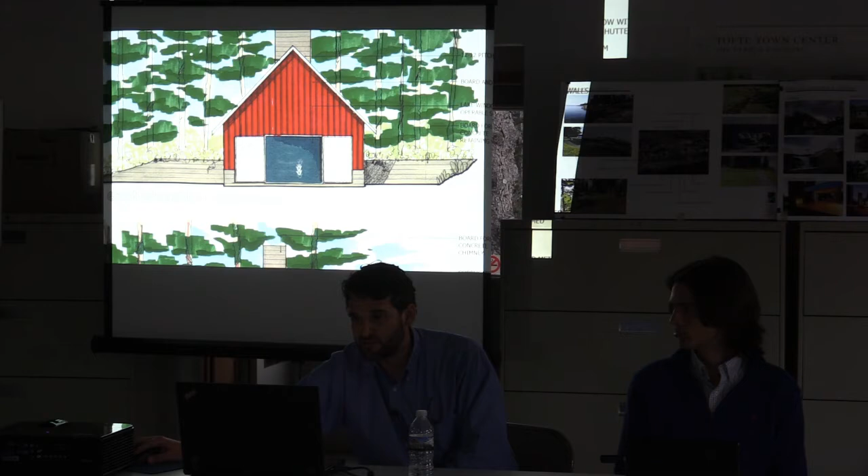This is the full view of it. As you look back then, those flanking board formed concrete walls run off to either side, and that's holding back the grade, so that grade is sort of nestled back. One thing that I did want to show on the site plan, just jumping back to that quick, this heavy dashed line right here is a 75-foot setback from Lake Superior. The 75-foot setback from ordinary high water gets you the setback for a building structure.

Technically, you can build within setbacks if you're under 400 square feet and they permit it. So there may be some flexibility there, but we feel pretty confident being outside of it that we're not going to have any real issues with the structure. Forty feet, that's from the vegetation line. Correct. So we meet all of the setbacks from the ordinary high water and vegetation line. The other one's bluff line, which we don't have to worry about here.

So the footprint, to give you a better understanding of what this looks like, is again the trail running up. There's the higher wall and then the lower seat walls. This would all be that board form style. You're on the terrace then, the pass through, dog trot, and then the terrace on the other side. This would be sort of a boulder wall to take care of a little bit of the grade that's needed on this side. These are outdoor tables, 4 tables set there. There's 4 tables shown in the indoor space as well. You could fit more tables in the space if you'd like to.

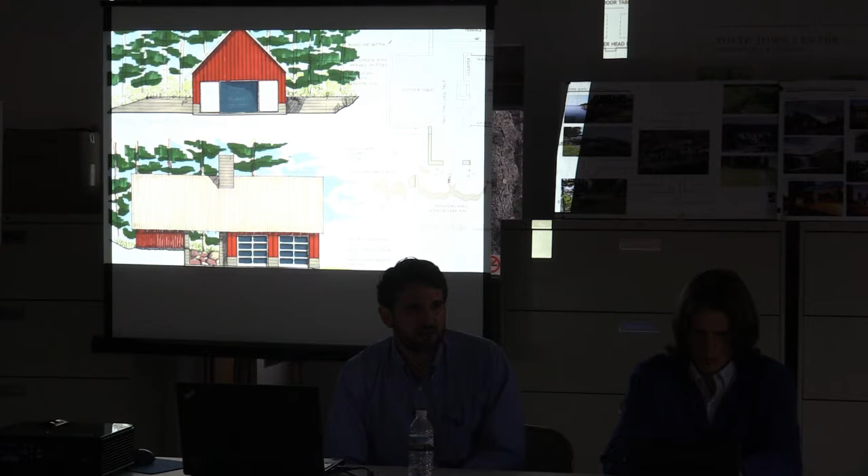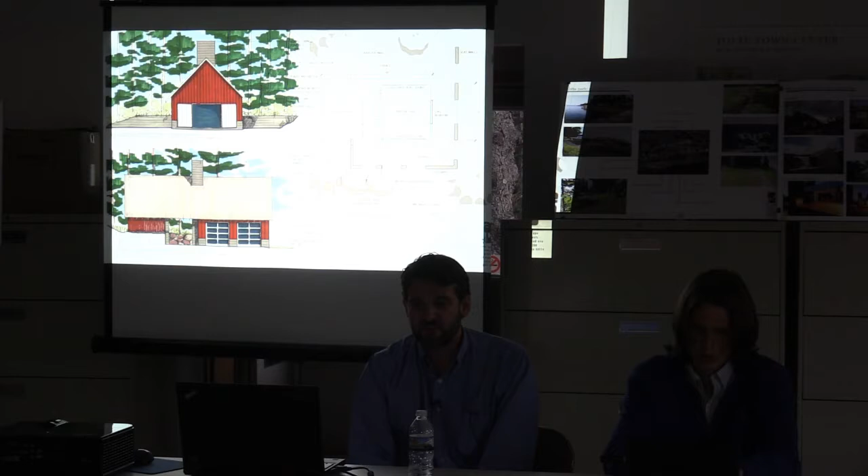Any questions? What kind of a roof material is that? Yeah, we have it as a metal roof, and it could be shingled. I think it's sort of wide open. Just from a maintenance and longevity standpoint, I think there's some value in thinking about a metal roof. They're expensive, but it's a good thing to consider.

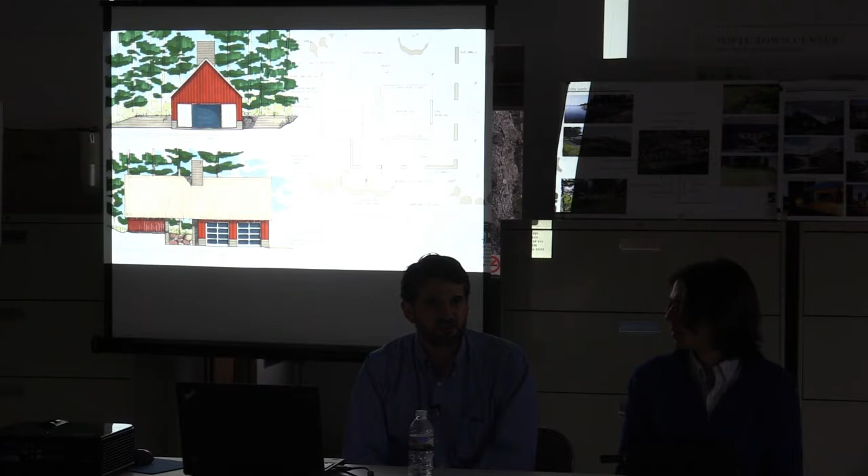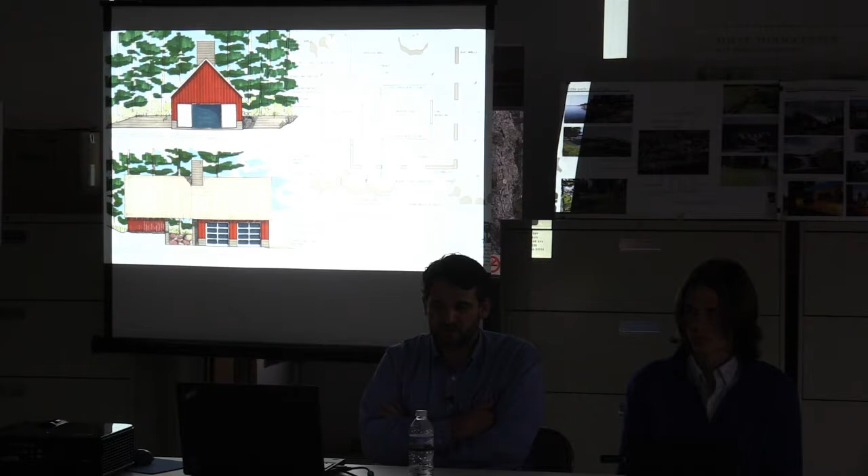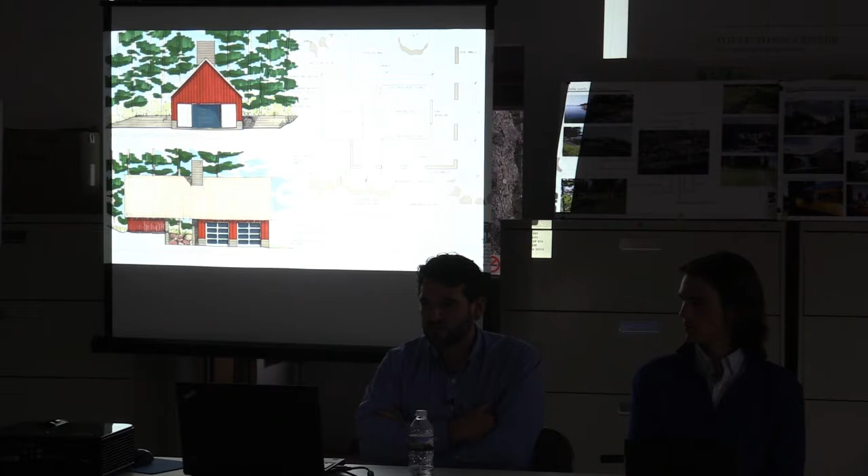But I don't think it's something that we have to get married to as part of the architecture of the building. It's something that's pretty flexible in my mind. But just from an ownership standpoint, and with what we've talked about in funding something like this and bringing in funding to pay for it, the metal roof makes sense to me because that upfront investment gives you those extra years of service. So feel free to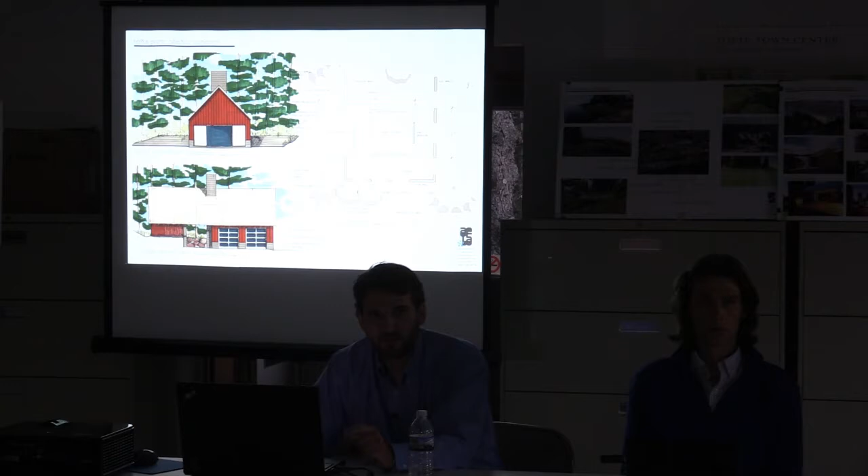The other existing buildings that are there have horizontal siding. Mm-hmm. You don't think it should tie in with those? It's certainly something we could look at. We went with the board and batten, but the aesthetic isn't changed that greatly by going to horizontal siding. So I wouldn't have a major issue with it. Part of the thought was that there's just some offset with the board forming, the lines of the two, to get some mix, so it's not just kind of corduroyed up the building.

But when you show the graph from where you've tucked it in on the shoreline and all, where is the old existing? Well, I can show you. The existing shelter's right here. Right over there? Yep, that dash line is the existing shelter. Okay. And the existing parking terminates about right here. Okay. So we're over half the way back. Yeah. There is that little cove. That's a neat spot where you got that tucked in there. Yep. I went down there today to take a look at it. We're right on the kind of extents of those tree roots.